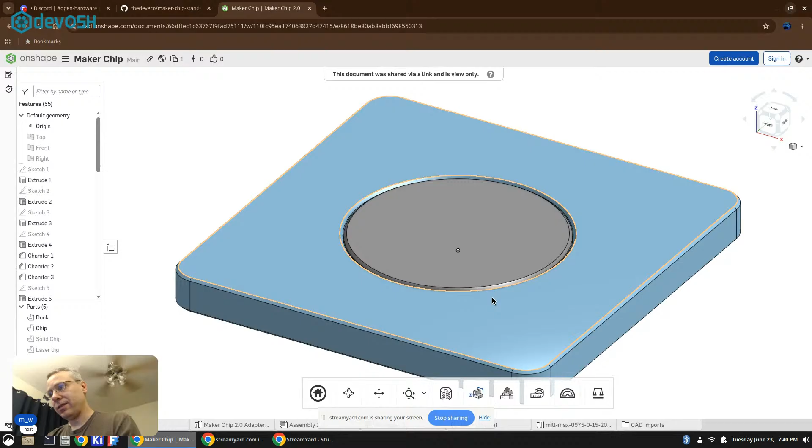I think you can get away with a gap, but this thing has got a pretty large gap in here. Let's go ahead and open the file in Bambu Lab real quick.

Let's see if I have that queued up here somewhere. All right, yeah, that was this guy. All right, okay.

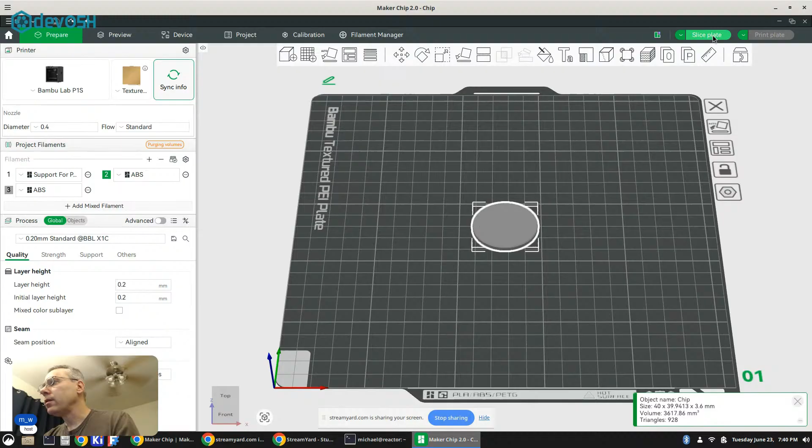Which is pretty much the 3MF file from the repository. So you can go to the slice plate, which gives you an idea of the layers it's going to have. Then you can shift through the layers with this scroll bar to see the hollowed out section, how the print would go in the middle, and then it finishes off. So I think I stopped it right here just to do a dry run.

So during this part of the print, you can add a custom G code - this is going to be different for each printer. For this one, you can just add a pause, and that'll give you the chance to place the magnets and continue the print. Pretty straightforward.

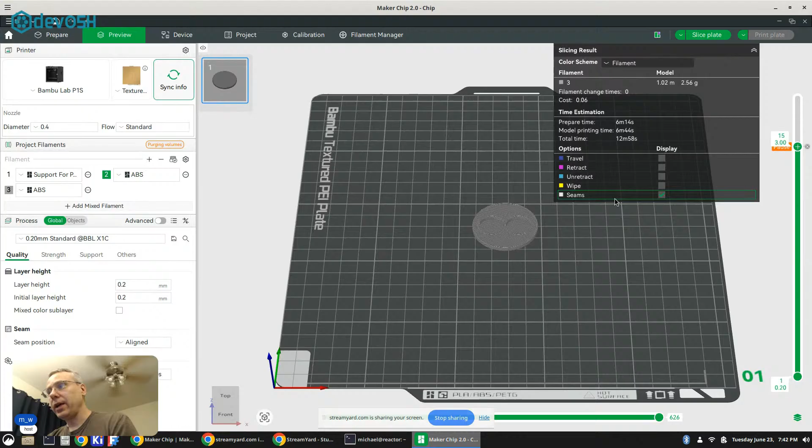I didn't have the magnets he was using, so I couldn't put them in there. I do have these smaller magnets, but I didn't have time to hollow out the circles, or the cylinders, a little smaller. So yeah, everybody should be able to reproduce his work.

Pretty straightforward. So if you have a different printer and some hacks are required for it, it would be good to share them if you're watching. I don't think this will be that much different.

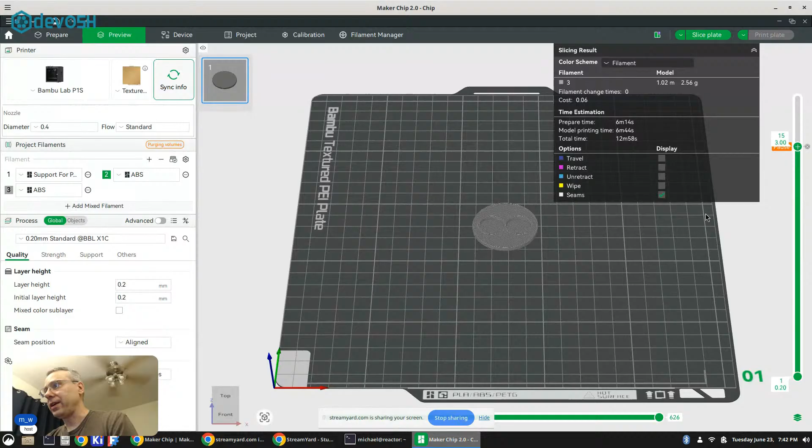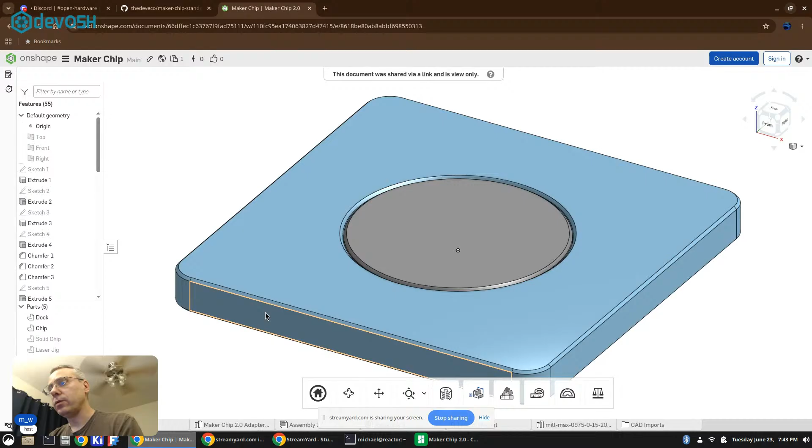I think all this software is kind of scavenged from other projects, but MakerChip is kind of a go. I think his plan is to bring a whole bunch of these things with extra printing on the outside of them to open source, which is cool. And if you want to make one yourself, it's pretty straightforward.

I should update this because this isn't how it is inside - it's actually 2 magnets. And yeah, all the documentation's here.

And if you already have a MakerChip, I think hollowing out your MakerChip might actually be easier to do than to reapply. But I guess it really depends on how you designed it.

I noticed I actually printed a multicolor print - I just took one from the... Multicolor prints are nice and they work, but it wastes more filament than it actually uses on the print, and I don't like that very much. There are some ways around that though.

When I printed this slug with the hollowed out area in the middle, I found that you can just do layer changes - just one layer, or you can switch the layer colors.

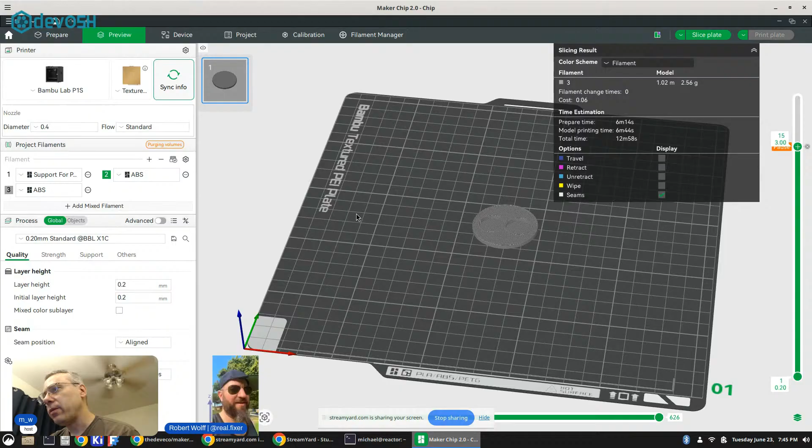Which 3D printer did you get? I got a Bambu P1S. It was completely free from work through the rewards program. Nice. I didn't win it or anything, but it was good. How much is a P1S? It's like $500, something like that. The P1S AMS combo is what I got, so it has... yeah, $500. That's a good one. I think it's also the one Peter Robinson has.

Here, let me see if I can do this real quick. How do I change my camera here? Can I flip my camera around? I don't know how to do it. Darn, oh well, I think it's probably fine. Do you have any way to share from your side, or are you just going to do audio and talk about what's happening, and I can show off in the background?

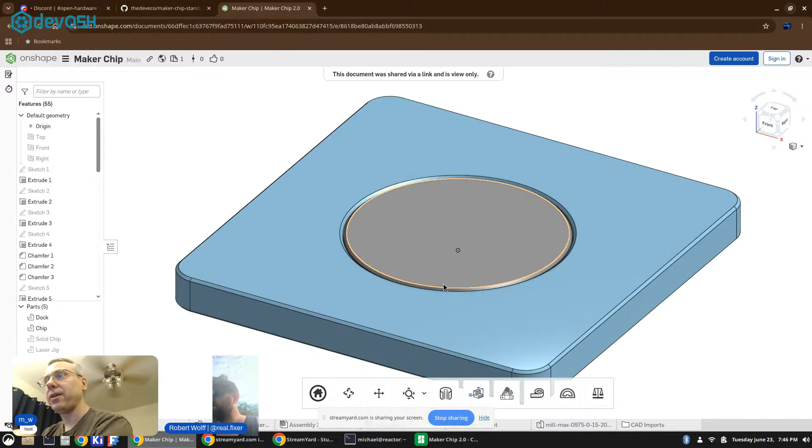Wait, look, look, look - remember this dog I had when he was a puppy? There he is, got him. Yeah, so he's back, huh? Yeah, he's kind of an elf, huh?